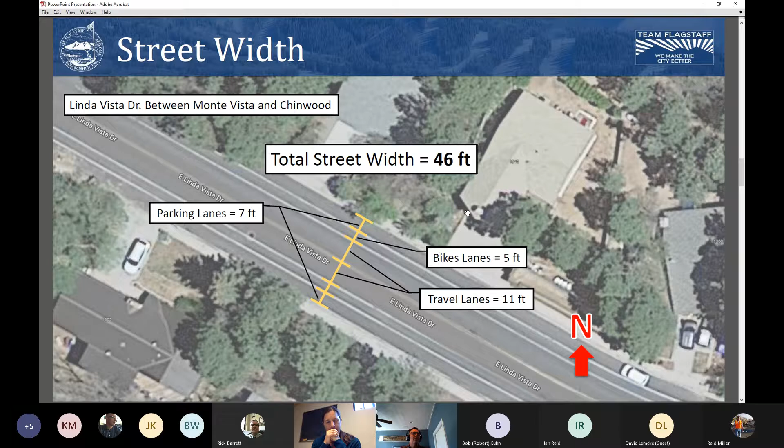We didn't have any elementary schools within 660 feet, no specific pedestrian generators like other kinds of schools, community centers, parks. It's low density housing, so it scored the lowest amount of points in that category. 5 points for adjacent parallel arterial or major collector within 2 blocks. We maybe could have scored 5 there, but it really doesn't matter whether we scored that or not because we're way above the threshold.

3 points for the bike route, and again, 20 points in the upper section and a total of 30 points to say yes, this road is above the threshold where we should look at traffic calming. So that's our staff recommendation at this point - we're scoring well above 30 points. This spreadsheet was established by the Transportation Commission years ago. We've talked about updating it and reviewing it, but again, this is well above the 30 points. So our recommendation is to continue on, and that's what we have here.

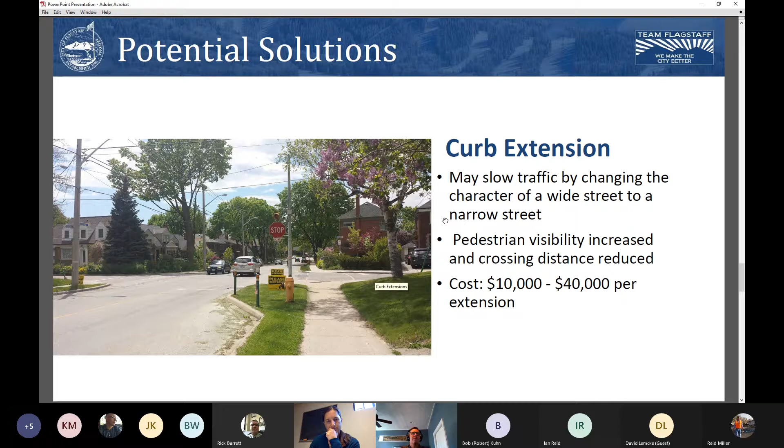Curb extensions are a potential for this area because we have the parking lane. Curb extensions are where you take the normal curb line and move it out - in this example, extending out as far as the parking lane, which is what we would be able to do on Linda Vista as well. Linda Vista has the bike lanes, so it's not going to be terribly effective because the bike lane is going to buffer the travel lane from any kind of friction this curb extension may cause. So it might be effective, but doesn't have a real high likelihood of effectiveness because we do have the bike lanes on Linda Vista. But it does have other benefits for pedestrian visibility, slowing cars down coming around the corners, which isn't a concern we've heard, but it's a good thing to do. So it wouldn't hurt anything, but it may not be terribly effective at our primary concern of reducing speeds.

Chicanes are an option here. So we have parking lanes, and potentially we could do curb extensions in a number of locations that are convenient, not necessarily blocking someone's only parking in front of their house, but it kind of acts like a parked car on the street 24 hours a day. Can be more effective when there isn't a bike lane. Again, the bike lane is going to buffer any kind of shifts we push onto the vehicles with striping, because often cars will cut the corners if there isn't a bike present, and most of the time there isn't a bike present in a bike lane. But chicanes are a possibility here, and it may be less a chicane and more just a series of curb extensions that kind of act like parked cars.

Lateral shift, kind of the same thing, but maybe this includes a median. We would also need to prohibit parking because we'd want to keep the bike lane. These boxes popping up, we'd want to keep the bike lanes, and that's going to buffer any kind of lateral shift effect. But this is a possibility as well, to get rid of parking and shift the travel lanes out and around a median.

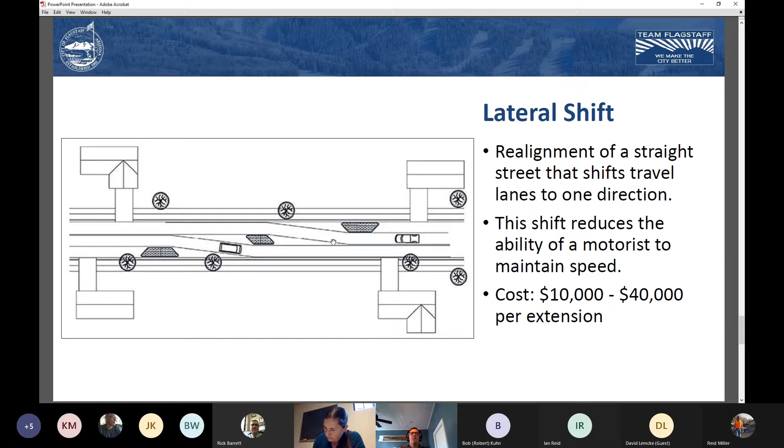But this can do this, is obviously going to slow people down in the vicinity of the device, and tends to break up these long sections of road where I think vehicles tend to just gradually pick up some speed.

It's interesting, this aerial photo does a good job. There are actually really nice horizontal curves in this section, which is one of our built-in traffic calming devices. When we design new neighborhoods, we don't allow long straight sections of road. This already has all of that. There's actually a little bit of vertical curvature as well.

But again, we know what the data is. The speeds are higher than we'd like to see, but this is a possibility.

I checked in with the streets department to see if there was any projects coming, and they told me that just off the screen, there is an intersection rebuild at Linda Vista. I can't remember which street, I think it was Paradise coming down. Jerry, you probably know which one it is, but in any case, there may be some potential there to incorporate some of these devices into a project that's already happening. It's not right here where we're having the complaint, but it would break up the flow. Potentially, we don't want to break up the water flow, but we'd like to break up the vehicle flow. So, potential opportunity there. And with that, that's my last slide.

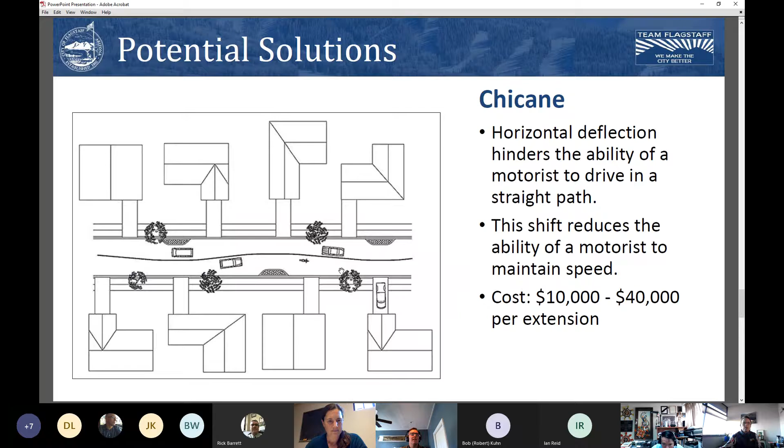Let's see, yes, so your question was, the concern is here. I think maybe your question was, does it look the same here? Probably. This section is probably actually wider, it's straighter and doesn't have houses fronting it, so speeds are probably even higher. But what we typically find, when houses don't front these streets, is a lot less of a concern for speeds.

So yeah, we could go any way the commission would like to go, but at this point we're focusing on this west end of the street. There certainly could be more requests, and if we measured speeds, they're probably higher here. I'll let you know that someone got a hold of me today with concerns on Lockett, and I'm going to guess Lockett has the same profile all the way down as well. There's really no end to finding problems on our collector network in Flagstaff.

So that's a good question, and I'll look for guidance from you all. I'm sorry, you had a second question, and I didn't write it down for some reason. Help me, Kate. The bike lanes and the roundabout. Thanks for the first answer.

Yeah, so the typical way to work with bike lanes in a roundabout or a circle -- this exhibit doesn't have a picture of the bike lanes, but typically on these neighborhood mini circles on more local streets, we don't typically have bike lanes, so the bikes and vehicles share the space. On a roundabout or even a mini roundabout, that still is an option, but typically we would provide widened sidewalks for the bikes that don't feel comfortable sharing the lane, to go out and around. I'm using my cursor to show that path. So that's what we would propose to do here.

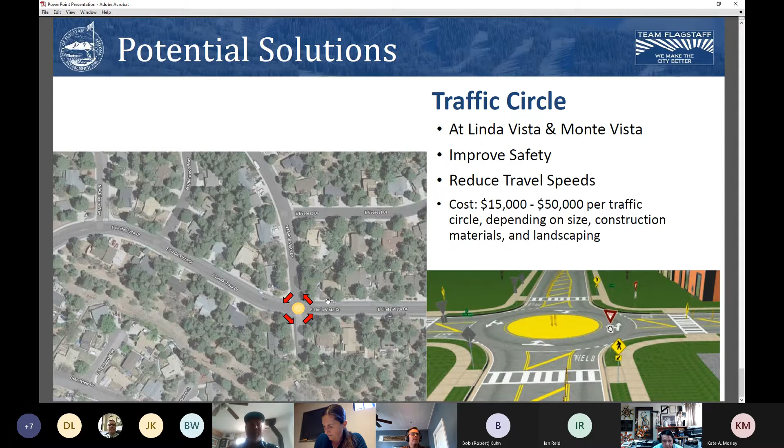Good afternoon, Madam Chair, thank you. I was wondering, in terms of implementation, the radar sign could be an initial effective step down around the corner where Paradise intersects Linda Vista there, and what the implementation process would be with that, but I imagine it's much simpler than the roundabout, and see if that would be effective.

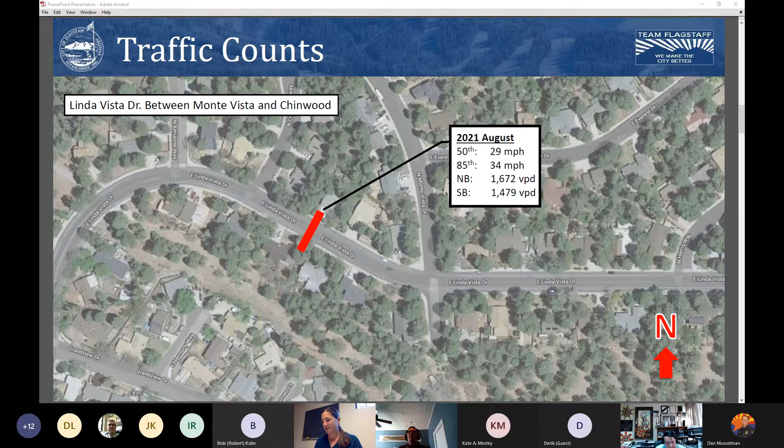This next item is similar—Fremont Boulevard speeding concerns in the Cheshire neighborhood. Jeff, I know you've got a presentation for that, so please go ahead.

Thank you. Yeah, so here's Fremont. This was also a neighborhood request that came in a little while ago, and we collected—I don't see your screen, Jeff.

What do you see? I see it, Madam Chair. I see it, I see it. Do you see me? I see it. I also see you. How about I stop presenting and present again just in case—we need you to be able to see this. Might be my problem. Julie has a problem, more than one. Councilman, I'm just kidding. Oh, now I see it. Thank you, that's great. It bumped back up, good.

All right, here's Fremont. Let's just jump in. So here's our vicinity map for Fremont. Fremont is in the Cheshire neighborhood—it's actually in Linwood as well, but the piece of road we're talking about, at least for now, is Fremont and Cheshire. Again, Cheshire is up on 180 in the northwest corner of Flagstaff.

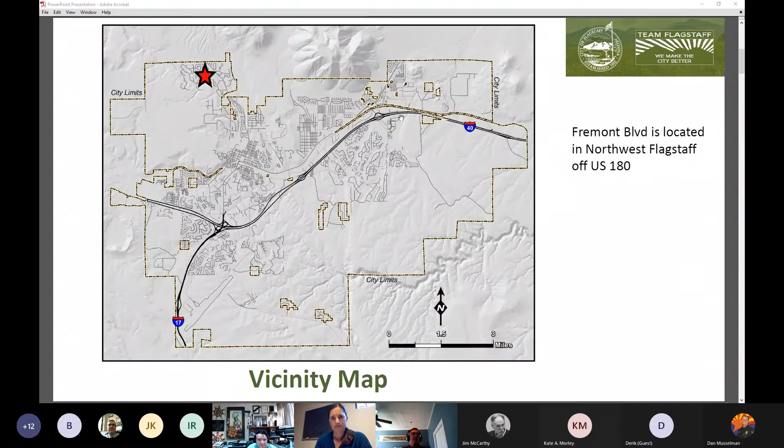Here's Fremont Boulevard. This is the last traffic signal as you're leaving Flagstaff headed towards Grand Canyon or Snowbowl. Fremont is the large collector street that comes in, and it's actually called Fremont all the way through Linwood, back to where it becomes Cooper coming back into the Cheshire neighborhood. So this is that 4-lane section. The FALA School is up near the corner, the Cheshire Neighborhood Park, and our particular study location is right about mid-block between the school and the neighborhood park.

Fremont is also a minor collector, so it's that yellowish-orange color on the regional plan map—I won't pull that map up because it's all built out. There's no expansions or changes to our regional plan for this area, so it is what it is today.

So, citizen complaints about high speeds. The road at this location is 60 feet across at the point of study. Some of this section has a frontage road in addition to the 60-foot roadway. It's designated as a minor collector, posted at 25 miles per hour. As mentioned, there's the neighborhood park, the FALA School, and a number of homes. For the first section of the road, the houses are sideways with no frontages, but as you move into the neighborhood, there are people backing out onto the street, and some frontage road. It kind of changes, but generally about 60 feet in width.

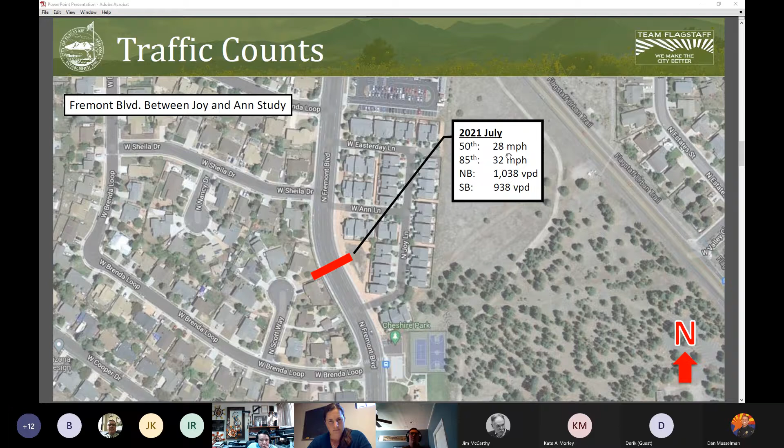So we had lower speeds than on Linda Vista, which is interesting considering what this road looks like. It is much bigger than Linda Vista. While there is some curves, it doesn't feel nearly as confined as Linda Vista. So about 2,000 cars a day instead of 3,000, and 28 and 32 for those measurement points.

Here's how the road is divided up today. It's a 4-lane road, which is really unusual. I actually forgot that this was a 4-lane road until we started talking about it again. We rarely have 4-lane roads, this might be the only one. I really didn't think we had any more of these left.

2 5-foot bike lanes, and then the road is split up amongst a bunch of 12.5-foot travel lanes. We typically haven't gone to a much bigger bike lane than 5 feet because people tend to park in them; at 6 and 7 feet they become parking lanes. But we'll talk about some possibilities here as we move forward. That's the layout of the street: 4 travel lanes and 2 bike lanes, and vehicle volumes only at 2,000 cars per day. Road was clearly built for a different purpose.

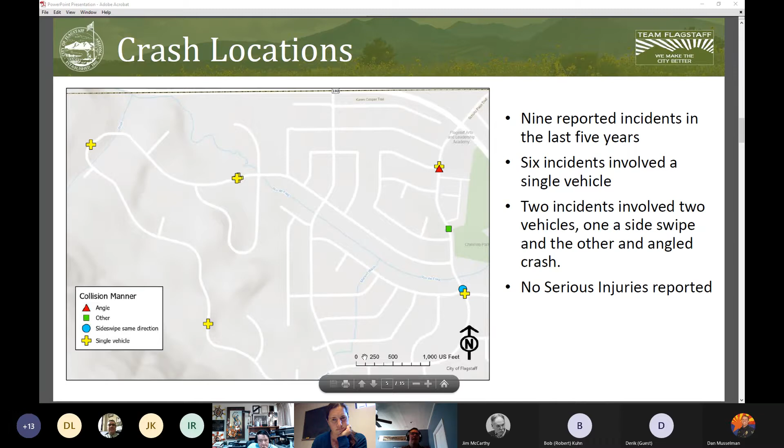My understanding is that this back section that became Linwood was anticipated to be a higher density, like Cheshire, and there may even have been additional sections of land that they thought would be developed at some point in the future. So the road was built with 4 lanes, but at 2,000 cars a day, clearly unnecessary.

This is a possibility here: radar feedback signs. And this is a different possibility than on Linda Vista. Because it's 4 lanes and we really only need 1 lane in each direction instead of 2, the street has the potential to stripe out those 2 center lanes and make them a gigantic 2-way left turn lane or something like that.

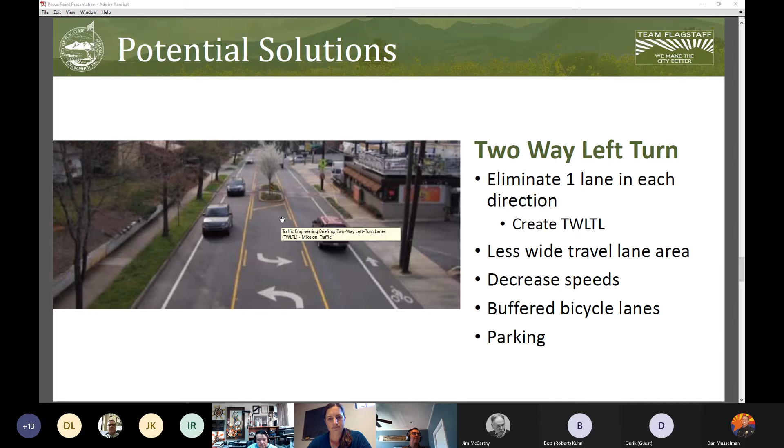So that's what the two-way left turn lane is. If you have a two-way left turn lane, you can install a pedestrian refuge island. One potential location is where we have that striped crosswalk already today at the park. A pedestrian refuge island helps with pedestrian crossings by breaking up that crossing into two distinct pieces, which is a real benefit. It narrows the width of the two crossings because you have the island in the middle, and could have some speed calming effect as well.

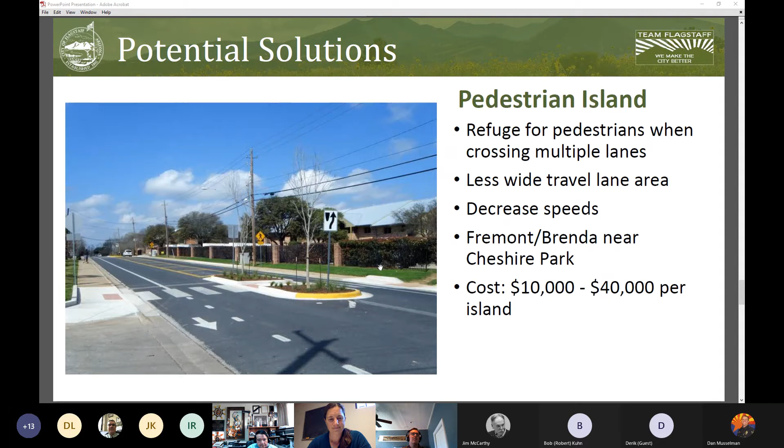And it's scalable - you can put these in just a spot or two. A median down the whole length of the road would be amazing. This cost would be for a single median; for the length of this road it would be really, really expensive, and I don't think we can recommend that. That definitely is going to be a funding issue to put a median down the whole length of Fremont.

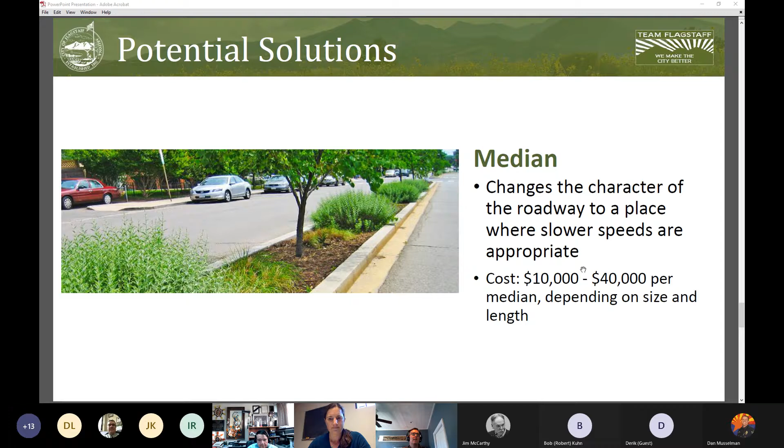But potentially in a couple of sections, medians could be beneficial. Spread out, landscaped could be really nice. Again, if you go to a single lane - this is shown on the four-lane section - but if you go to a single lane, we potentially could do some sort of traffic circle.

We have it shown here at Brenda Loop, just as an example. It could be in a different spot - we could pick a couple of spots along the street. Traffic calming in one spot on this length of street is not going to be effective for the whole length of street; you have to repeat the pattern a couple of different times. In this case, you would just pick every other intersection or something like that, with either islands or circles or some sort of treatment like that.

So that was the end of the options. Just to let you know, as Fremont transitions, this section you can see is the four-lane section. There's actually a parking lane, two bike lanes, four travel lanes, and a frontage road in this section. Then the frontage road ends and the road narrows to just a travel lane in each direction.

We received a complaint since we did the study when we had good weather. In the other section, we received another complaint, and we have not yet checked speeds here to determine if this section is also a potential candidate. But just to let you know, this one, as soon as we get some warm weather, will also be something we'll be measuring, and if the speeds are elevated, we'll be bringing it forward to talk to you.

And with that, that's my last slide. Happy to answer some questions on this one.

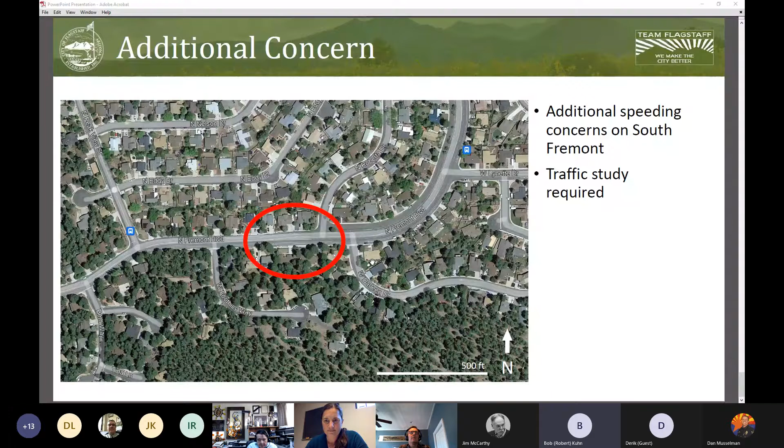It's certainly a possibility. I don't have any idea what kind of volumes of pedestrians, if that would be a good cost-effective location to install one of those. We haven't measured it. I don't think they actually will reduce speeds except when somebody pushes the button to cross. It could be a good use here because of the park and the neighborhood, but it may not make a big dent in the speeding issue we're looking at.

Well, with the island there too. I was just asking where you'd put the island so they cross there. The island would be helpful. Yep, thank you, in combination with the island.

That's what I was going to ask - if you have any idea how many kids cross there and go to that park. I do not know at this point, but that's something we could measure. I know they used to play a lot of basketball out there.

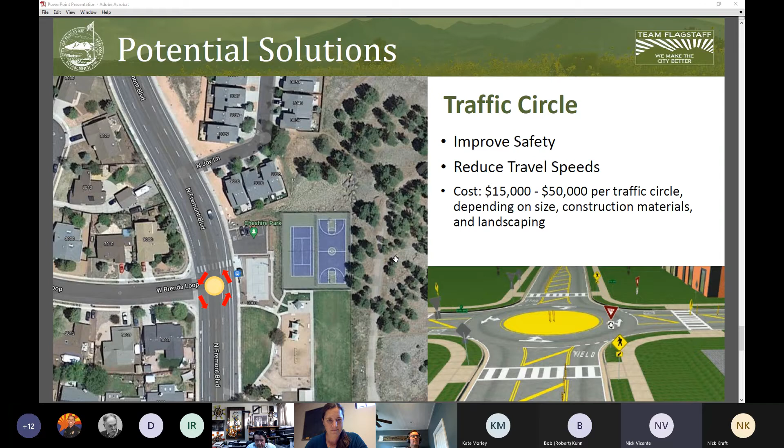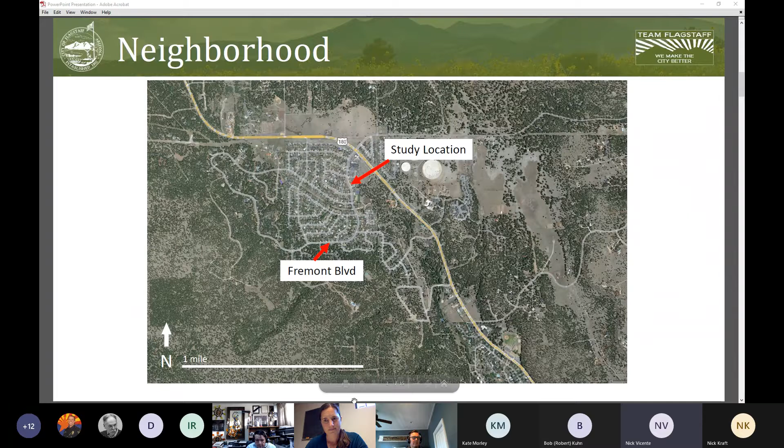Where I am, where it funnels down to two lanes if you're heading westbound, as the road curves, there's no visible indicator that things are changing. Really, it looks like if you're westbound, you're now funneled and you have a faster route. And if you're heading eastbound, as soon as you hit that four-lane spread, things start to accelerate quickly.

To my knowledge, there's only one speed limit sign, and that's shortly after you turn westbound from 180. Once you make that turn at that stop sign or stoplight, there is not another stop sign until you get up to Linwood. That's almost a full mile, if not a little more, where there's no speed control, no signage. And even considering the park is only about a third of the way to that next stop sign.

Hopefully, if you do another study on this in the future, we can look farther west. There is a bus stop at North Peak and North Fremont, where I thought that might be natural for another stop sign, at least to slow people coming in and out of Linwood, as well as the strange area where we've got that almost service road that ties in at North Roberta. It parallels North Fremont from North Roberta down to West Wilson. So hopefully we get a look at the bigger picture of the entire street, because it's kind of designed like a racetrack all the way around the neighborhood if you look at it on Google Maps. That's all, thanks.

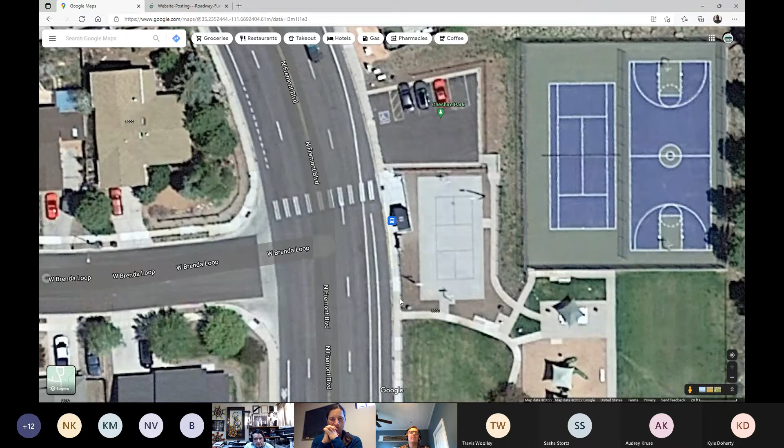I think that crosswalk, Jeff, do you know if it's a high vis crosswalk, and if there's signage with symbols for crossing at that location? Yeah, it is a high visibility crosswalk, that's all we do, or high visibility crossing. I don't remember exactly what signage is out there. We don't typically put ped warning signs up at intersections, so it probably does not have pedestrian warning signs, but there may be some in advance. I don't remember exactly what's out there.

I also heard some support for perhaps an island at that location. That could be something that's tried through candlesticks. Anyway, those are just ideas. I think this goes into that bigger conversation about budget available to do these things, and being able to prioritize those.